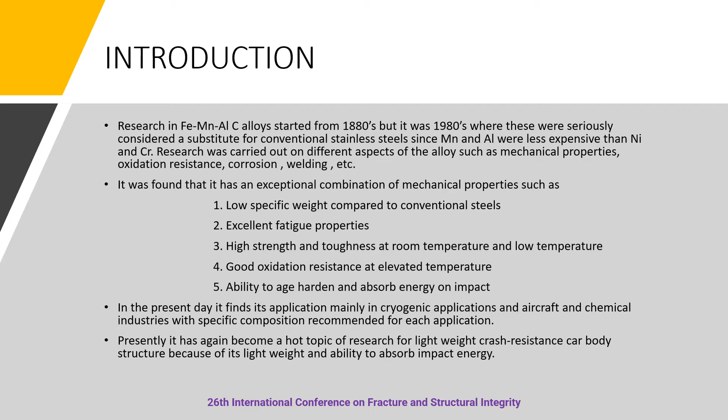In the present day, this alloy finds its application mainly in cryogenic applications and aircraft and chemical industries, with specific composition recommended for each kind of application. Presently, it has again become a hot topic of research for lightweight, crash-resistant car body structures because of its light weight and ability to absorb impact energy.

Now, the alloys in consideration are two types of alloys which were named B23 and B37. It can be noticed that in B23 the amount of aluminium and manganese are higher, which is 6.5% and 39% respectively, whereas in B37 the aluminium content is 4% while manganese is 36%.

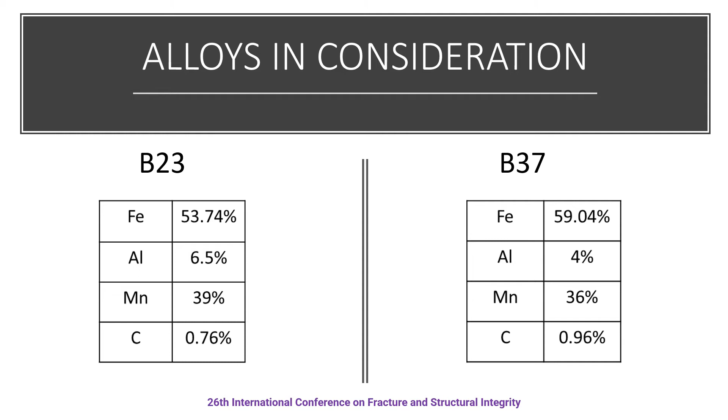Now coming to the procedures, they can be divided into two halves. In the first half, the steel was tested without any kind of thermal treatment, while in the second half, it was tested after being solubilized at 900 degrees Celsius and age hardened for 16 hours at 550 degrees Celsius.

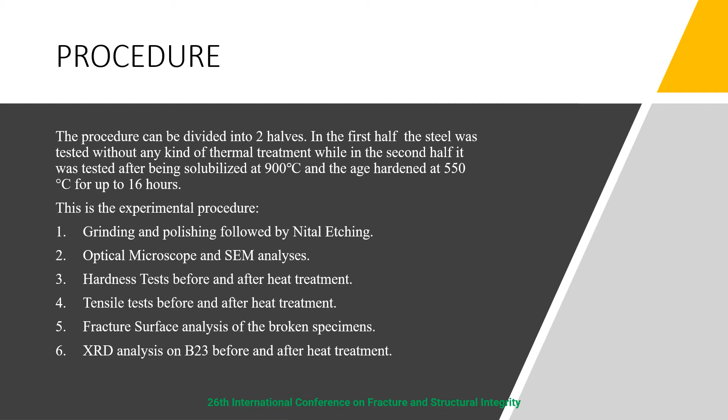The steps for this experimentation can be divided into grinding, polishing, followed by etching by Nital solution for 75 seconds, then optical microscope analysis, followed by hardness test before and after heat treatment. Then a tensile test before and after heat treatment was done. This was followed by a fracture surface analysis of the broken specimen, and finally an XRD analysis on B23 before and after heat treatment was done.

After grinding, polishing, and etching, both the alloys were analyzed for their microstructure without heat treatment. Here, as you can see, both the alloys have a similar kind of microstructure, that is austenitic in structure, and both of them have visible twins.

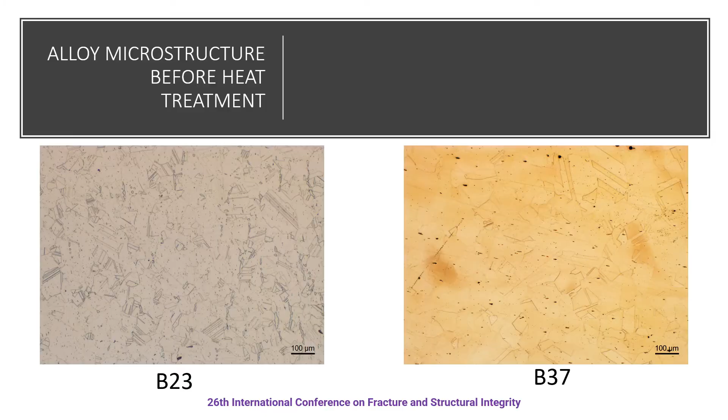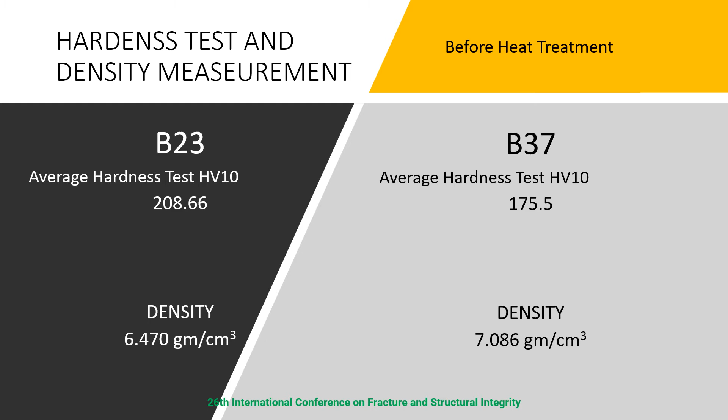A hardness test and density measurement was carried out on both the alloys before the process of heat treatment. For this, a Vickers hardness test was done. As you can see, the average hardness for B23 is 208.6 and the average hardness for B37 is 175.5. Later, a density measurement was carried out where the density of B23 was 6.47 grams per cubic centimeter and the density of B37 was 7.08 grams per cubic centimeter.

Since this kind of alloy is known for its good aging properties, both the alloys were subjected to an aging test at 550 degrees Celsius after being solubilized at 900 degrees Celsius. These two graphs show the Vickers hardness test at different aging durations. While the hardness of B37 is more or less constant after a few hours of aging, it is B23 that becomes interesting, as it can be seen from the graph of B23 that there is a sharp and substantial increase in its hardness with respect to aging duration.

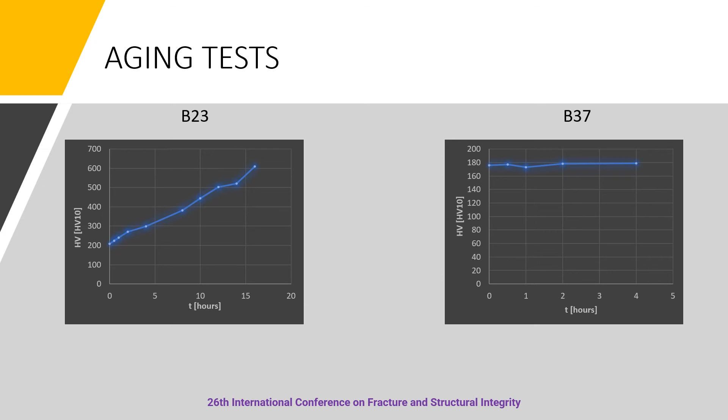When we carried out tensile test on both the alloys after 8 hours of heat treatment, the nature of B37 did not change, while the nature of B23 changed completely. After the heat treatment, the yield strength of B37 was 422 megapascal, while the ultimate strength and elongation were 817 megapascal and 38% respectively. But when B23 was subjected to heat treatment, the alloy became very brittle and broke with very little load without going into the plastic region.

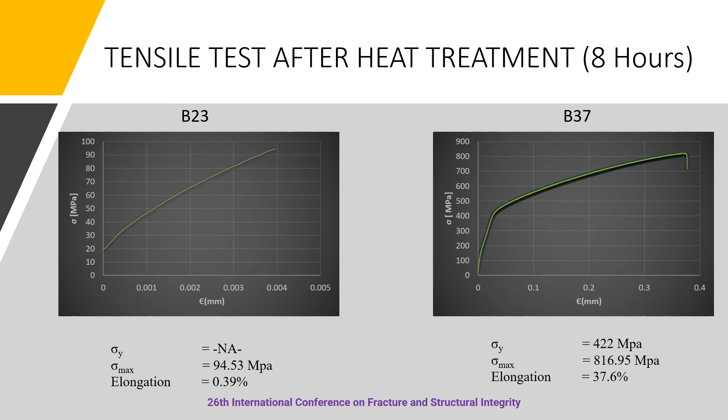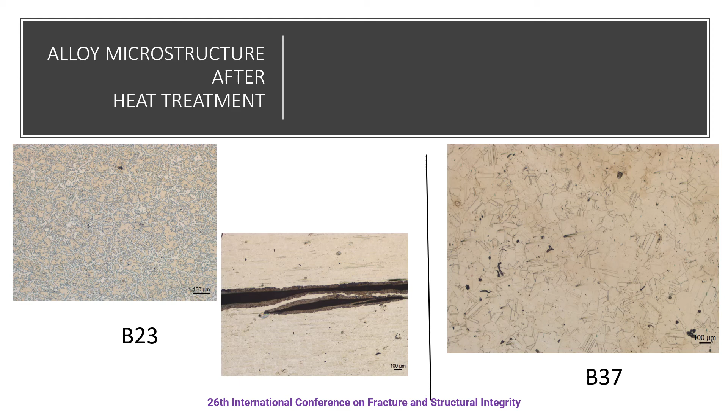In order to study this change in behavior after heat treatment, the microstructure of both the alloys was again analyzed. While B37 has the austenitic structure as before with visible twins, it is B23 that has completely changed its microstructure. From the picture in the center, it can be noticed that B23 has also formed delamination layers after heat treatment.

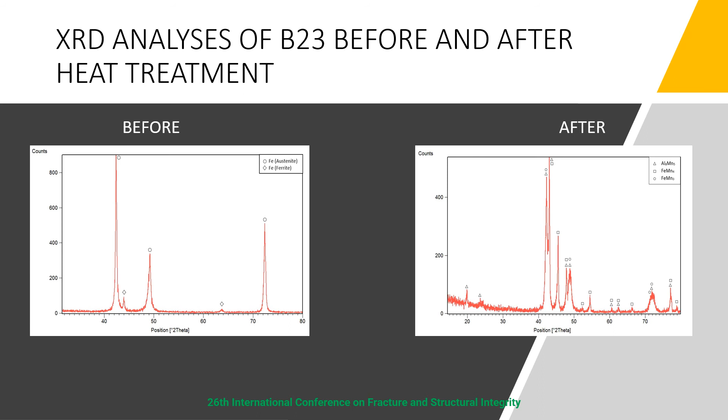To study this brittle behavior of B23, it was subjected to X-ray diffraction before and after heat treatment. Before heat treatment, it can be seen that B23 has only austenitic phase with a little amount of ferritic phase. While after heat treatment, we can see that it has developed intermetallic phases such as aluminium manganese and iron manganese, which explains its change in microstructure and its brittleness.

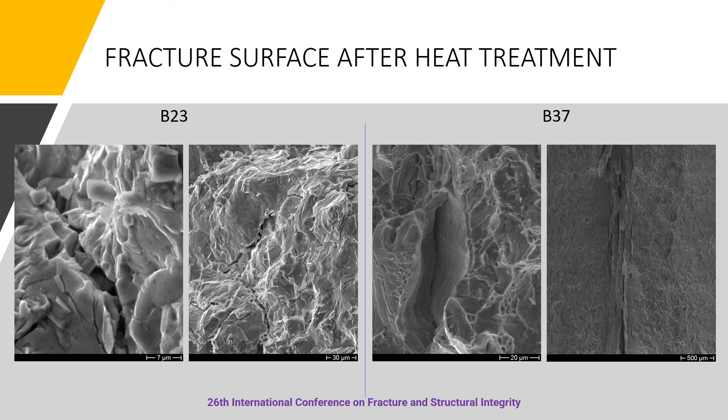So, in order to conclude, we can say that the composition affects the behavior of these alloys, especially when the alloy works at a temperature above 500 or 600 degrees Celsius. The alloy with higher quantity of manganese and aluminium becomes brittle due to the formation of intermetallic phases. Lastly, it is of paramount importance to optimize the chemical composition of the alloy in order to guarantee a high fracture toughness at high temperature.